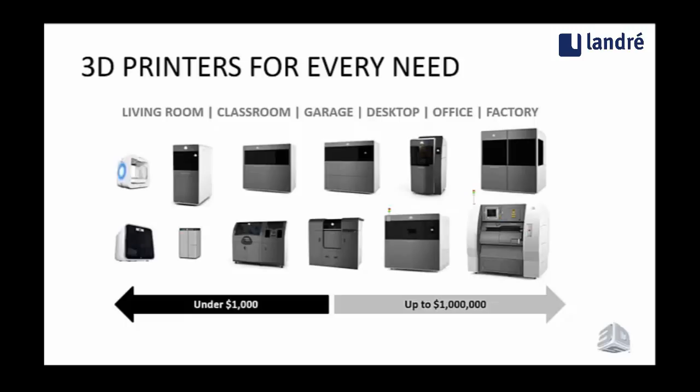When we talk about the applications of 3D printing, we can broadly categorize them into 5 categories. The first, and sort of the earliest in the product development process, is the idea of printing a 3D model for communication. This is all about making aesthetically pleasing models that have all of the details, and may or may not have color involved, so that you can communicate ideas. This is great for selling new design ideas—architects use it to sell clients on design ideas before they've spent the time to go through and make the very detailed models. So it's really about the beauty of a 3D printed part when we're talking about communication models.

The next step in the development process is really prototyping or validation, and this is all about printing functional parts that approximate or exactly match the properties you're going to get from a production part later on. The value that 3D printing offers is that you can have your parts essentially instantly—you don't have to go through a tooling process to get to those early prototype parts. So you can iterate and come up with many different ideas, and every piece you print can be different, and you can have them in your hands usually in a matter of hours from when you've designed them in CAD.

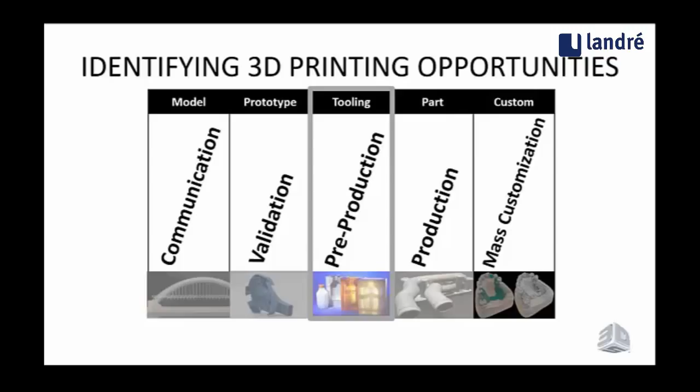With that, I'm going to hand it over to Ray so that he can introduce you to Bi-Link and continue on talking about how they're using printed injection molds.

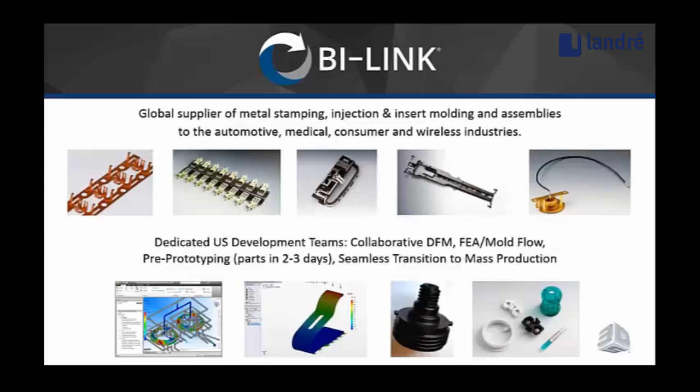Our biggest impact happens when we engage with engineers. We call it E to E. This year we rolled out the hardware store by Bi-Link, and what that is, it's a place for engineers, by engineers, to collaborate with our technical staff and get access to our technology and resources. The idea is to let our clients test, talk, tinker. We want it to be an extension of our customer's model shop with access to a ton of global manufacturing horsepower. Part of what we do in the hardware store locations, we have one in Raleigh, North Carolina.

We're in San Diego, we'll be opening up there soon. We host events for our customers, and the idea is bring technical people together to talk about the challenges they face, blend in our tooling expertise, and see how we can help solve problems.

We talk about the Midnight Lunch Lab, which is housed within each of our hardware store locations. That's a nod to Thomas Edison. In our perspective, he was a master at bringing together teams of people with diverse backgrounds to define and solve really big, worthwhile problems. And we like that as kind of a basis and a philosophy for us in our hardware store locations.

What we saw is the opportunity with 3D printed injection molds. A few years ago it became clear to us that our customers across all industries required us to do more faster. Improvement needed to happen by an order of magnitude, not incrementally. The process needed to happen in days, not weeks. Design for manufacturability needed to happen real time and at every step of the development process. And we had to have speed and flexibility to accommodate changes.

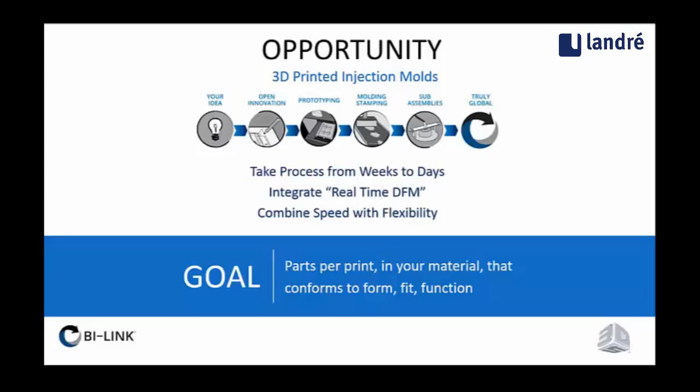So our ultimate goal was, how do we get to the point where we can come up with a few parts per print in the specified material that conforms to form, fit, and function, and we need that now, not later.

So how did we get here?

As Tom mentioned earlier, complexity with additive manufacturing is free. Tooling is complex, so by extension, additive manufacturing should at least be part of the solution. We learned that it's really more than that.

We did some preliminary research and saw that printed molds had been attempted. Anybody that checks online and looks on YouTube can see the problem: the same spoon and impeller have been shown for years. There was really no evolution in it.

So we started experimenting. We placed a small initial bet, bought a cube printer for $1,000, and started goofing around with it. We had some reels of PLA, and you do what manufacturers do, you tinker with it. We saw what it was good at, we saw its limitations, and most importantly, it got us asking more questions.

What we found with the team from 3D Systems is they were a really big help and provided a lot of resources for us. Ultimately, when we looked across the industry, we settled on the ProJet 3500 HD Max as our technology base and platform to build off of, to get to the next step, which was 3D printing injection mold tooling for prototype samples.

What we learned that defied our original expectations: printed molds can take a lot of heat. As Frank will discuss in some of our case studies, we're running everything from polypropylene through liquid crystal polymer through printed tooling, and heat is not the enemy of the tool, which surprised us. We thought that was going to be a limiting factor, and it wasn't.

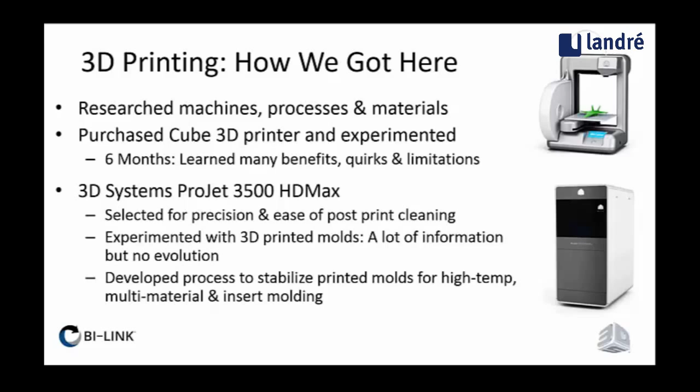So it has checked all of the boxes that we needed. We've even been able to do multi-material, we've done insert molding, and we'll share examples of those case studies with you right now. So with that, I'll turn it over to Frank Zaberna, and he can walk you through the applications.

Frank: It's an example of one of the parts we did in LCP. The tube is about 6 inches long. It had a fairly thin wall section, so you could see where we injected from. The material, if you clamp it upright, will take enough pressure that you could fill that whole length and the little undercut at the end. So once you learn these molds, you could do a lot with it.

You could see our temperature was 650. The hottest we've injected into these molds was a little over 675, a special material we were running a couple of weeks ago. So they will take the temperature. This particular mold, we made better than 24 parts out of it with the LCP material. So it will take the heat, and the tolerances are exactly what you would expect out of a production tool.

The parts are exactly to print. The mold's making the right size. There's not a problem with warpage or twisting or anything else. The parts are extremely stable in these molds because of the way they cool.

And then the temperature, it's thermally inert. What we find with this material is it's pretty much dead to temperature, it doesn't really absorb a lot of heat, which I think is why you could inject into it at such a high temperature.

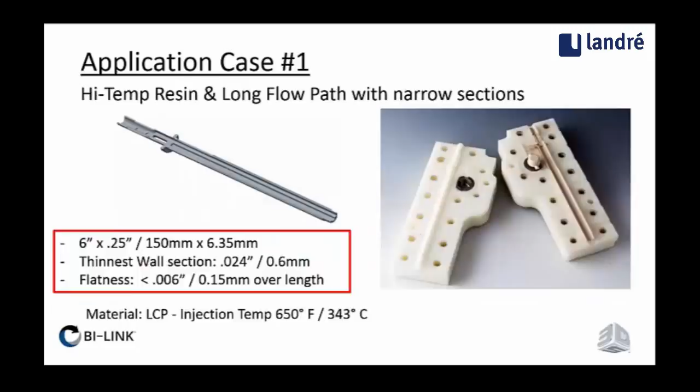When you go to cool parts, you have to be careful. It'll take longer to cool than you're used to because it won't remove the heat from the material. But an upside of that is you get extremely flat parts because they cool so slow and evenly. So that's one of the reasons, once you learn how to use that to your advantage, that it doesn't absorb the heat, it lets you inject some pretty interesting parts. Cooling the material in the mold isn't an issue, so you could keep it flowing longer and really fill up into some thin sections. This was a part we did in an elastomer.

This was a test part, so it was still in development. We did 4 spins on this part within 6 days, and that included shipping them. Basically, the customer would get the parts in the morning, check what they needed, do a modification. I would run a mold overnight, shoot new parts in the morning, ship that afternoon. So you could really turn parts quickly.

We printed the mold last night. It's running this morning. I loaded the tables with 2 molds this morning that are going to run parts tomorrow morning. Those are ABS gears, so they're fairly involved parts, and again the material's a little higher temperature.

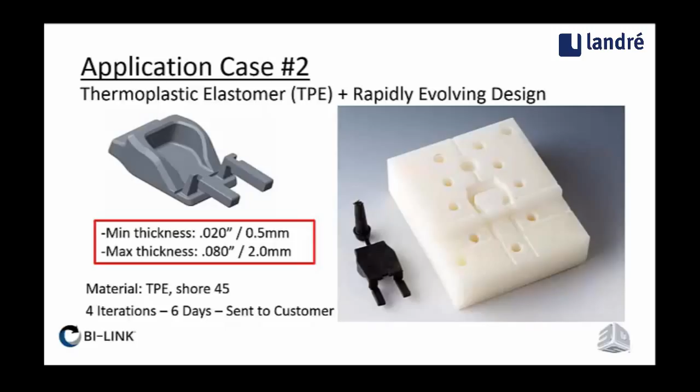We've insert molded metal contacts, plastic tubing, fiber optic bundles, actually other plastic parts inside of another piece of plastic in these printed molds. So pretty much anything you could do in a metal mold, any type of tooling you would do in metal, you could do in this, up to a given size.

Normally our molds are about a 4 inch by 4 inch mold. So if you could stay inside that size range, it'll handle most anything. But different types of, like I say, the insert molding, whether you're molding in tubing, fiber optic bundles, or metal, you could do that process with this tooling and still be able to do it in a day.

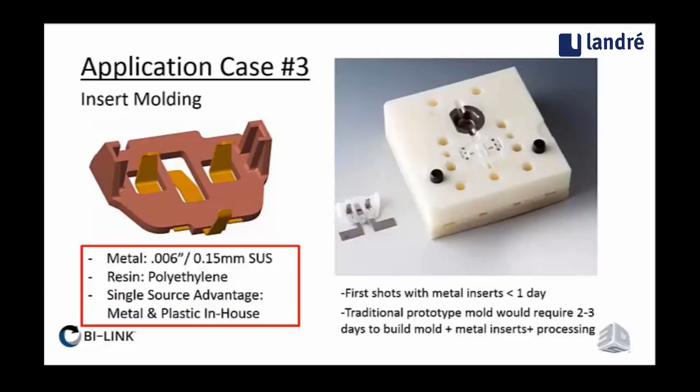So now what I'm going to do is talk to you about the ProJet 3500 series printers. As Ray mentioned, what Bi-Link uses is the top end of the 3500 series, which is the ProJet 3500 HD Max. But there are several models available that offer different speeds, different build sizes, and different accuracy and resolution offerings, and of course come in at different price points.

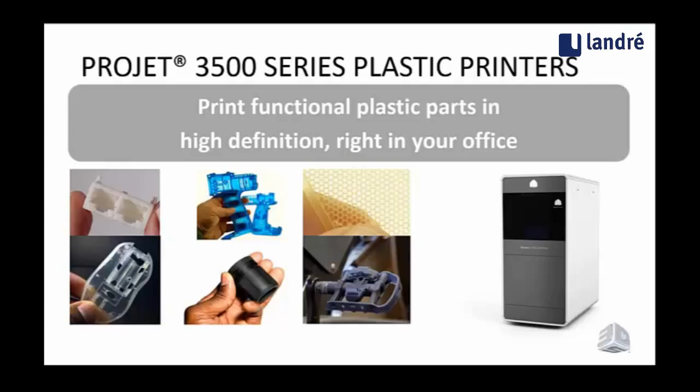But the 3500 series is a printer that prints functional plastic parts in high definition, and it can be used right in your office or out on a lab floor or a shop floor. It's quiet enough and clean enough that it can be used in an office, and a lot of customers do choose to use it that way.

The ProJet 3500 series prints really beautiful functional plastic parts, and you can see just a few of the different parts here. We can run materials that are white, black, clear, and we have a variety of other materials I'm going to go through in just a moment. But you can see some of the different applications, and a lot of people are using Project 3500s to print prototypes or to print some end-use parts.

And then, of course, we have the more novel use of the ProJet 3500 to actually print tooling, like what Bi-Link is doing. Another example of printed tooling is the image you see in the upper left-hand corner, which is hydroforming of sheet metal. That piece you see underneath the formed metal part is a printed mold pattern that is then hydroformed at many tons of pressure.

And as Frank and Ray were talking about earlier, the materials that come out of the ProJet 3500 and the parts that come out of this printer stand up very well to high pressures, so they can be used in applications like hydroforming as well.

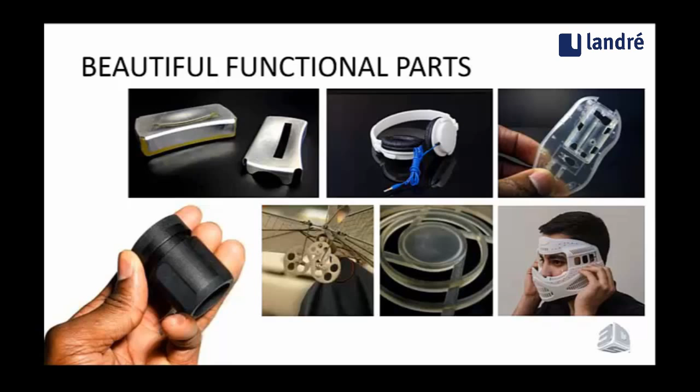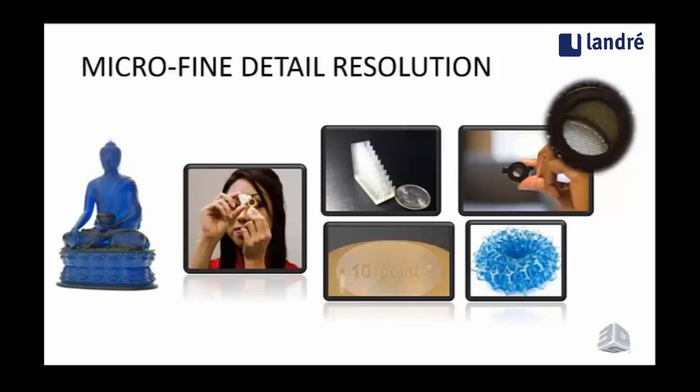That's a few centimeters tall, and you can see all the fine details on it. So parts coming off of the ProJet 3500 are aesthetically pleasing. They can have all of the detail that you want, and we offer some really beautiful materials that you can print in. But more importantly for most people is that they're very, very accurate. They have great fidelity, and you can see every detail, and you can get every functional component that you need out of this printer.

The ProJet 3500 uses, as I mentioned earlier, our MJP technology, which stands for multi-jet printing. This is a technology where we're jetting out a photopolymer and curing it with UV light. One of the benefits that our MJP technology has over other printing technologies is you get really consistently sharp edges and corners and very smooth sidewalls.

You can see some small parts here with really tiny holes and features in them, and they all come out beautifully, which again has some aesthetic value, but more importantly, there's real functional value when you've got parts that need to mate with other parts or have very small hole features and things like that. You get very crisp, sharp definition out of the ProJet 3500 that you don't necessarily get out of many other print technologies.

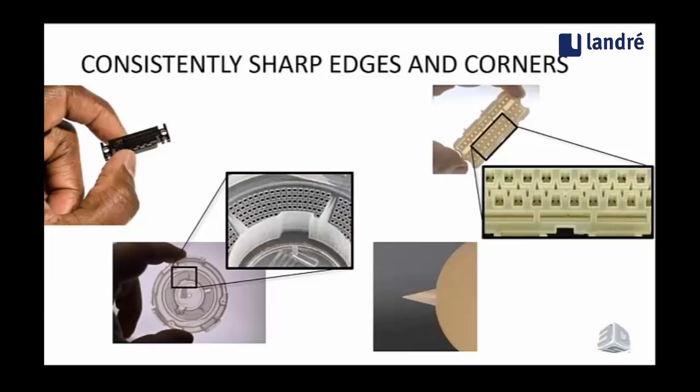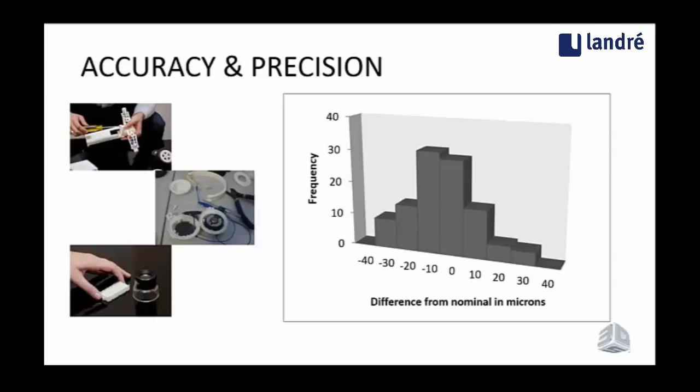These printers are known for their accuracy and precision. These parts that you print will snap together. They can be assembled very effectively together. And in the example that Bi-Link is using for printed molds, they will clamp together and you won't have flash and that sort of thing, which is another benefit of the accuracy and precision and edge definition that you get out of the ProJet 3500.

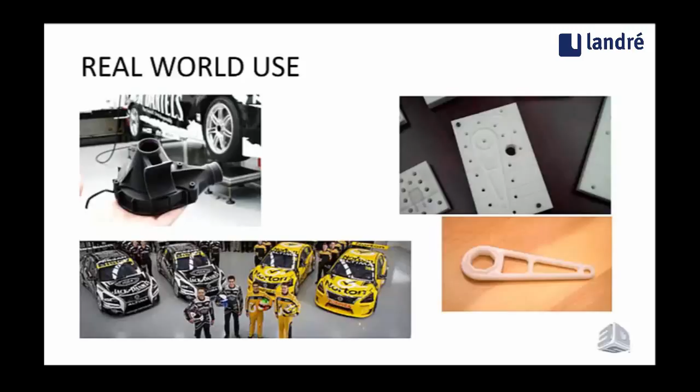On the right is another Bi-Link mold example. You can see the mold up top and the part that came out of the mold down below. As we've been talking about, the materials that we're using in the ProJet 3500 are coming out plenty strong for this application. And speaking of materials, we offer a variety of different materials.

There's different colors with ABS-like performance. We have materials that are biocompatible, USP Class 6 compatible for medical applications. We have translucent materials, and we even have castable materials so that you can print and then cast in a metal of your choice off of the ProJet 3500.

I should mention that we're talking about the ProJet 3500 plastic 3D printers. We also have a line of ProJet 3500 wax 3D printers. We don't talk about that in this presentation, but the wax 3D printers are used to print sacrificial patterns for a variety of different casting applications.

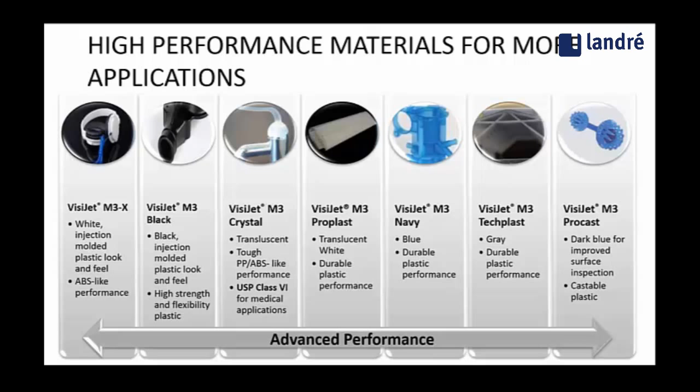So some of the other benefits of the ProJet 3500, and one that it's really well known for, is its melt-away wax support. Like all 3D printers, the parts being printed on this machine need to be supported while they're being printed layer by layer. And the way we do the supports in this printer is with wax, so it's very simple and essentially hands-free to post-process these parts.

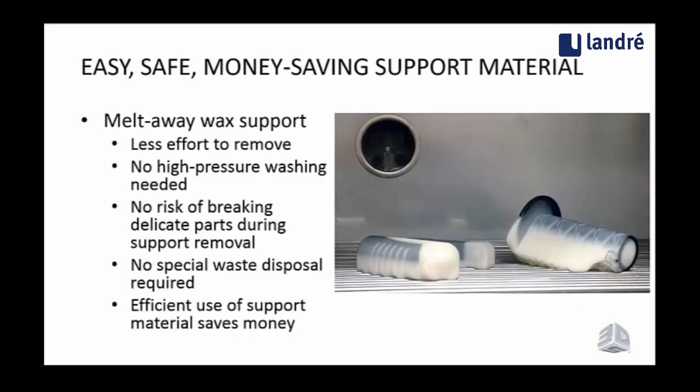You take them out of the printer. They've got wax holding them up as they're being printed, so you take the whole part out with the supports on it. You put it in an oven, and the wax simply melts away. It's almost entirely a hands-free process. You do a little bit of hand work after you've put them in the oven, and they're ready to go.

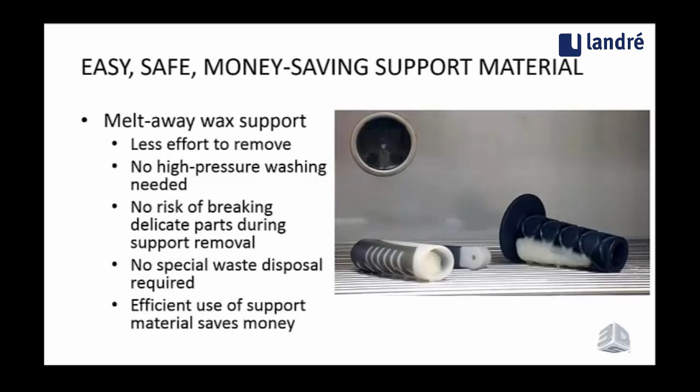One of the huge benefits of this is that because you're not manually cleaning these parts, there's little to no risk of breaking any delicate features as you try to remove the supports, because it's just melting away. There's no special waste disposal required because it's wax coming off of the parts. It's a very efficient use of support material because, in fact, it's not solid wax that's printed—it's about 40% air left inside the wax support structure. So it's a very efficient use of support material.

The Project 3500s have long-life print heads, very low maintenance, and they come with a 5-year warranty, which gives you peace of mind so that you know you're going to get 5 years of good, strong use out of the print head in these printers.

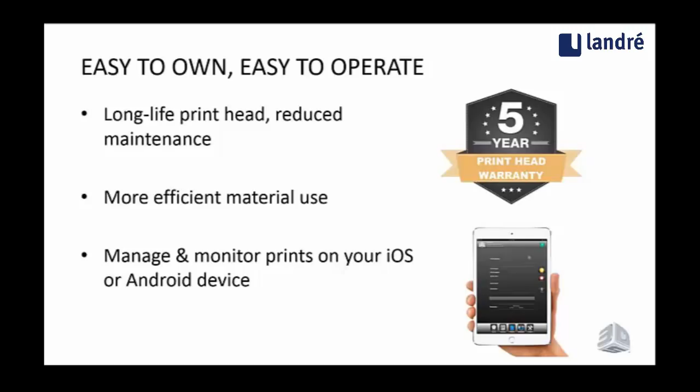As I mentioned earlier, they're known for their efficient material use, and we have Android and iPhone apps so that you can manage and monitor prints remotely with the printer. So again, it's an easy-to-use system.

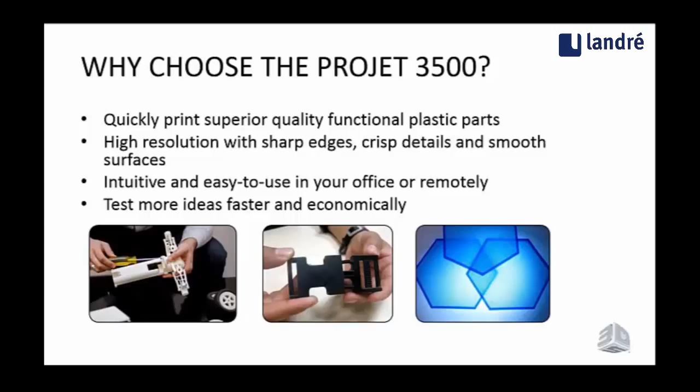So why choose the ProJet 3500? Just to summarize, because you can quickly print superior quality functional plastic parts. They're very high resolution with sharp edges, crisp details, and smooth surfaces. It's an easy-to-use printer, it's intuitive, and ultimately, it's all about being able to test more ideas faster and very economically.

So now I'm going to turn it back to Ray and Frank to talk about some of the results they've seen from using printed molds.

Thanks, Tom. Just to run through the high-level benefits we've seen across these 3 applications, and we come across new ones every day.

The first part we looked at with the high-temperature material, the LCP, was part of an 8-part package we received from a medical device client of ours—a major player, a major company. What this process allowed us to do, and allowed our customer to do, because of the ability to compress the design and development schedule, we actually helped them pursue a parallel project to one that had already started a number of weeks earlier. In about a 4-week period, we had a working model in production materials that concluded at about the same time as the original project. So it allowed our customer to basically double down on their development effort based on the much shorter lead times to bring the product to market.

The elastomer project, as Frank mentioned, really helped our customer with an internal project. Without the speed we were able to deliver, they would have really missed the window of opportunity. Again, the speed with which we're able to do this, and the flexibility it brought, was a huge advantage for the customer. These are major players, people who understand what best-in-class looks like across all segments of the supply chain, and speed and accuracy still wins.

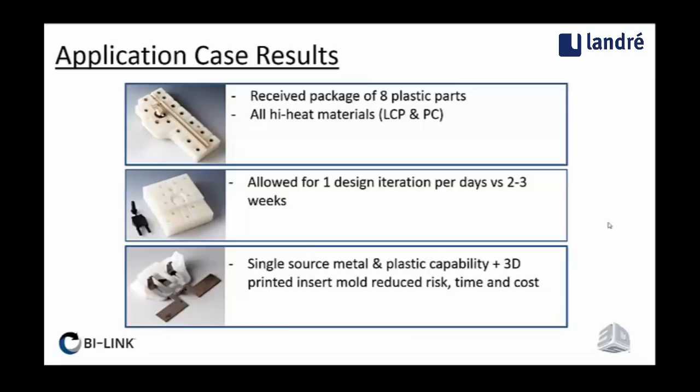The first question is, how do you predict production mold cycle times using this approach? We still use the traditional simulation tools and run mold flow analysis, but the cycle times don't really correlate because of the thermal characteristics of the printed tooling material versus a steel mold. You need to look at it differently - they're independent of each other. Printed mold cycle times will be longer by definition based on the thermal characteristics of the material. But we're focused on using this process to get that first 1, 5, 10, 20 pieces right now. In parallel, using what we've learned in development, we'll go back to our regular simulation tools plus our 50 years of experience to dial in a production cycle time.

Thank you so much. The next question is, how much post-processing is required to finish and resurface the cavity surfaces? We don't do any post-processing on them, no updating the finish. We use them as printed - no secondary sanding or anything else. They're used as printed.